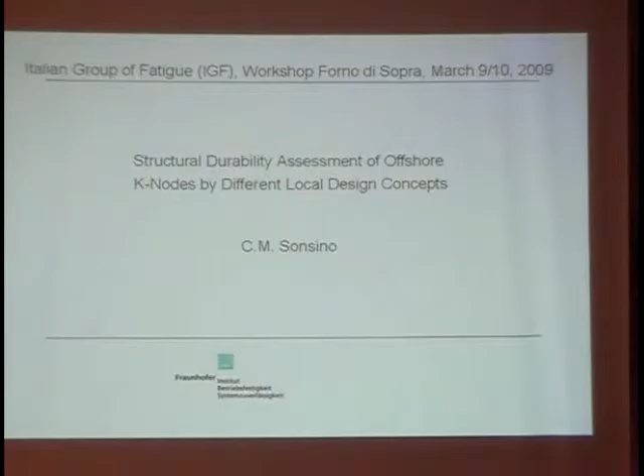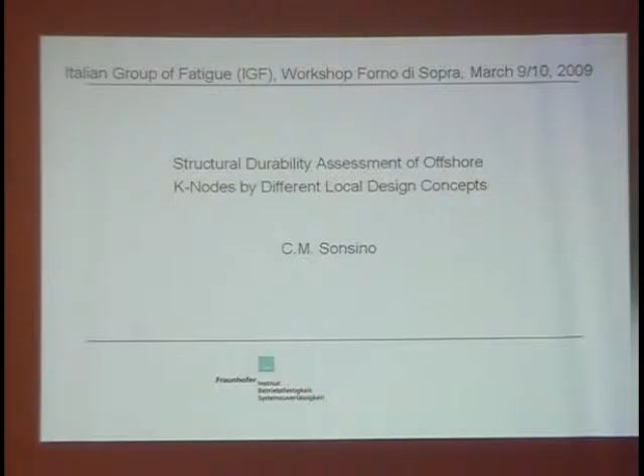Now, with regard to my talk, I want to talk about the structural durability assessment of offshore K-Nodes by contrasting different local design concepts. The question of offshore K-Nodes is again something which gains actuality, especially with regard to the energy problems, wind energy, and all these things related with that. And these K-Nodes are essential parts in the jacket of such structures. You can recognize it.

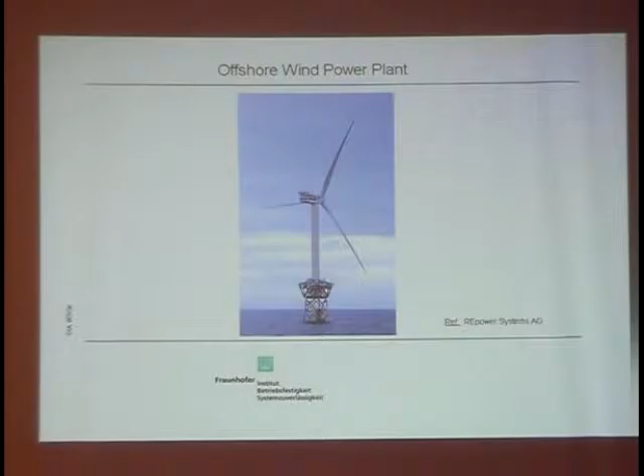These are these parts which are welded in form of K-Nodes. You can see it here, or in conventional oil platforms you can recognize it here. These are these structures, and certainly they have complex loading. It is not only fatigue loading, not loading only with variable amplitudes. We have also the environment causing corrosion, and we have to see how to work with that.

Now, the basis of the results that I am presenting to you was determined at the end of the 80s, beginning of the 90s. We had a very big program on offshore K-Nodes of the European steel industry. At that time, certainly, the evaluation was carried out with the methods of that time, of 20 years ago. And today we have modern methods. And as the investigations at that time were done very meticulously with strain gauges and all that was necessary, they could be re-evaluated with modern concepts. And this is what I'm presenting to you here.

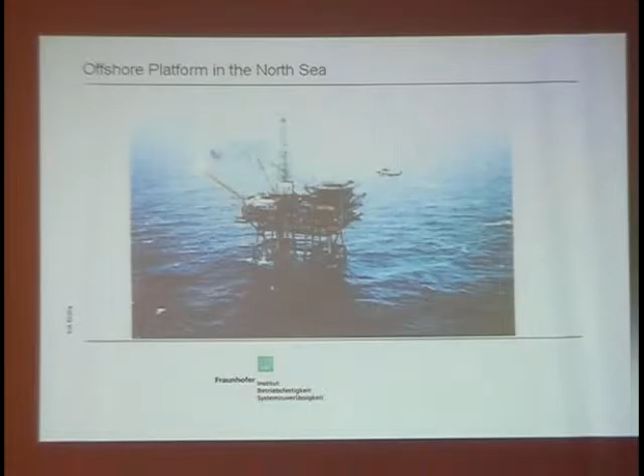Now, with regard to design concepts in structural durability, we had already spoken in the afternoon about these concepts. We have different concepts. The nominal stress concept is the classical concept, but it is only applicable if we are able to define a nominal stress. If we have a complex structure, or complex failure locations, and we are not able to define nominal stresses, it is useless to try to apply it. The second condition for the application of the nominal stress concept is to identify a notch case, a notch detail, a weld detail.

I am today not talking about the nominal stress concept, because you will see in the structures that I am dealing with, you cannot define a nominal stress. So this was the reason why the structural stress concept, also called the hotspot concept, was developed, for compensating the lacks of the nominal stress concept. But the structural stress concept, which I will also treat, has some shortcomings. It cannot evaluate, for example, hidden weld notches, slits, etc. All these things are in a logical continuation, a logical chain.

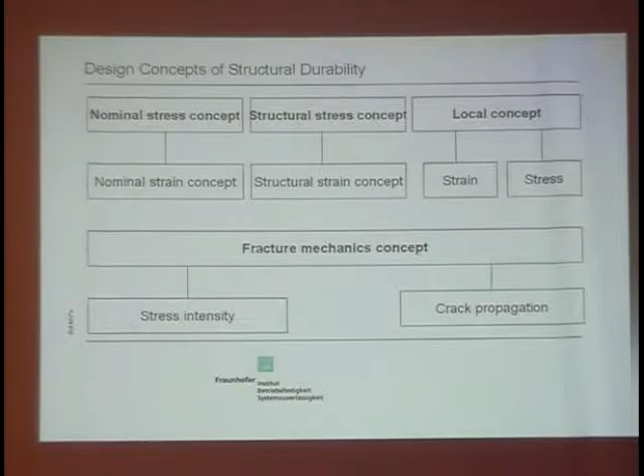Then the local concepts, as Paolo Lazzarin also introduced in his lecture, were introduced. I will treat here the local notch stress concept. There are also other variants. And certainly we have also the fracture mechanics concept. With regard to stress intensity and related energy, Paolo Lazzarin treated that. In my presentation, I will show you results and calculations of crack propagation. So I will treat these concepts which I have presented here.

Very shortly, about what we are talking: the structural stress concept. I'm not treating the structural stress concept with the value just close to the weld notch, which was also treated in one of the presentations, this old concept of Haibach. I will treat here the hotspot concept. The hotspot stress was also explained. It is gained if we make the stress analysis outside of the weld detail. Then there are some rules by which you can extrapolate the structural stress to the weld toe, and then you have to evaluate this stress.

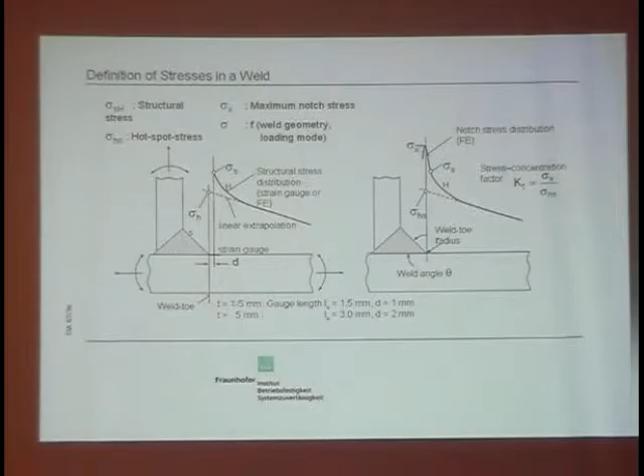But if you have a hidden notch, for example, if you have here a not fully penetrated weld, and if the critical area is here, you cannot do anything with this value, you cannot extrapolate it to this area. So what you have to do is to determine a notch stress for this area. This shows you schematically how you can put the reference radii in the different notches; especially in these areas you cannot capture these points by the hotspot stress concept

coming from outside. And with regard to this reference radius, Paolo Lazzarin also explained to you the hypothesis behind it. It is the micro-support hypothesis of Neuber, which was varied by Radaj, where he derived the value of 1 millimeter notch radius. Certainly the application of this radius also has a limitation. You can apply this concept only to thicknesses of 5 millimeters upwards.

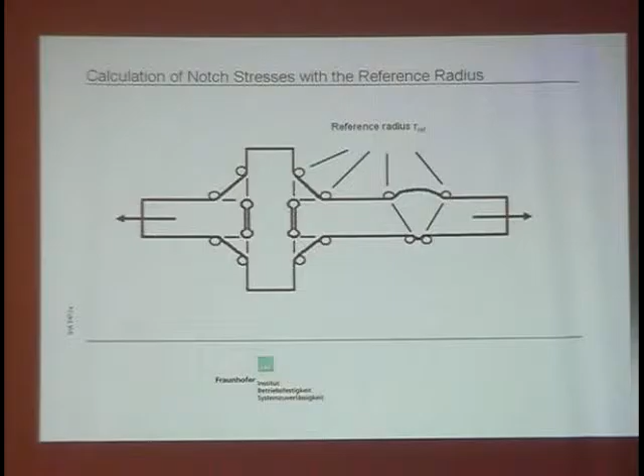If you are at 5 millimeters, you come into a conflict situation, so you have to make some compensations which don't function every time. And if you are lower, if you have thin sheets, you have to go to the 0.05 millimeter concept, which has a fracture mechanics background. But I'm not treating this. If you are interested in the application of the 0.05 millimeter radius, then come to Venice to the Eurojoin. There I will give a paper where I treat this concept with various examples.

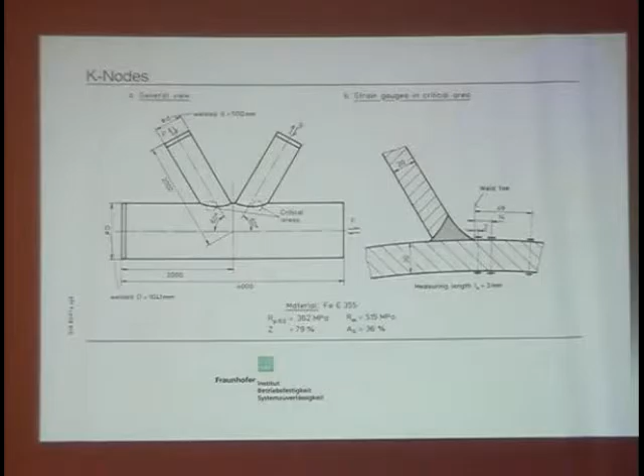The steel was the fine-grained steel FeE 355. This is a steel grade which is used very often in the ship industry and offshore industry. Now such offshore structures see variable amplitude loading in the North Sea. The load comes from the waves. What you see here is the overall spectrum for 1 year. It contains 10 different sea states, from low sea states up to very high sea states. Every sea state has a Gaussian distribution, but when you superpose Gaussian distributions, you end up with a straight line distribution. What you see here is also an omission.

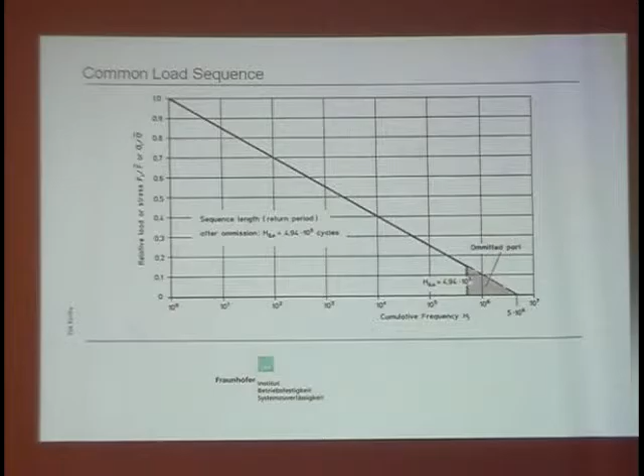In 1 year we have about 5 million cycles, because the frequency of the waves is not high. So you come up to 5 million cycles, but if you now want to carry out your test, you have to repeat this spectrum, this sequence, with a total of 5 million cycles, more than 25 times, because for an offshore structure the required fatigue life is at least 25 years. So you will never finish this test, so you have to make a non-damaging omission. That means omitting some amplitudes which don't damage, in order to do your test in a shorter time. So much for the spectrum.

Now to damage accumulation. What we apply here is the Palmgren-Miner rule. Please don't say Miner rule. Before Miner it was Palmgren. I think everybody knows how to apply the Palmgren-Miner rule. But what we do here concerns the damage sum. We don't apply the damage sum 1. It is already written in the IIW design recommendations: the damage sum to be applied is 0.5.

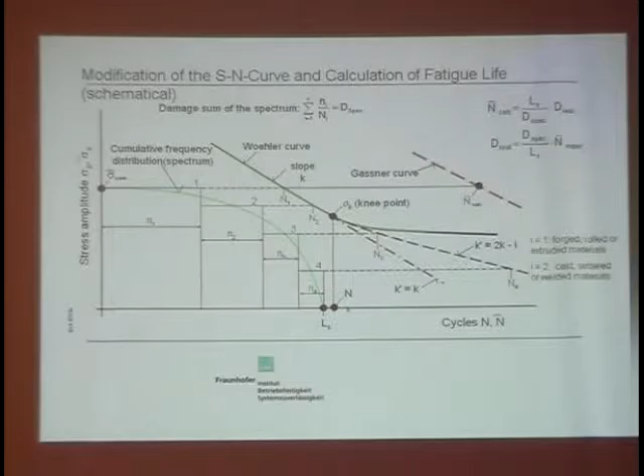This is based on a lot of investigations carried out in the past 30 years. If you apply damage sum 1, 90% of all published results under variable amplitude loading are on the unsafe side. So the recommendation coming from LBF, and now it is part of the IIW recommendations, is: please apply 0.5. So much for damage accumulation.

This is the test rig. Here you see the big structure. Here is the actuator. It is a 2,500 kilonewton actuator. Here you see the braces joined to the chord. And you see here also a basin. This basin is filled with artificial seawater with North Sea conditions.

That means we have here a pH value of 7 and permanently a temperature of 15 degrees. Certainly in the North Sea the temperature also goes down, but for corrosion it is important to have the higher temperature and not the lower temperature. And so you see here with these elements, the actual loads are introduced into the structure. The maximum frequency we can carry out here is 5 Hertz, only for the smaller amplitudes.

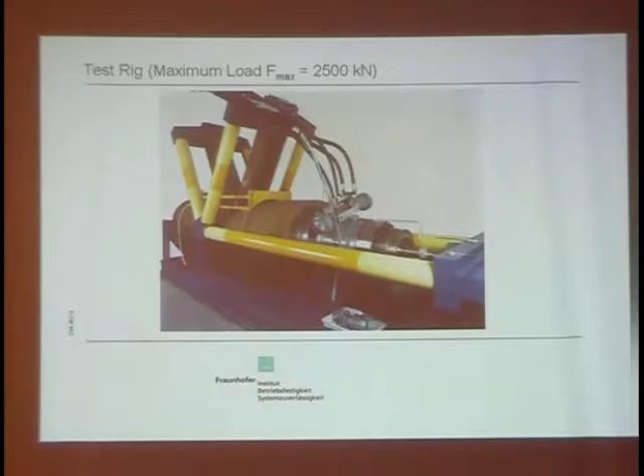We have carried out here constant amplitude loading tests, only 3, and 5 variable amplitude loading tests. The test duration is between 4 to 6 months in constant amplitude loading, and in variable amplitude between 5 months and 1 year. So one institute could not achieve this task, therefore we were 3 institutes and we shared the work among us. Beside the LBF, the IABG and the Thyssen Research Center were involved in this work.

Now let's have a look first at the results that we obtained, all presented first in the system of the applied load. Here we have the load range, and here we have the cycles. On this side we have the constant amplitude loading. There are 3 tests which have been carried out. The triangles are the test results in terms of breakthrough. This is the stop criterion. It corresponds to total failure of a relatively small specimen.

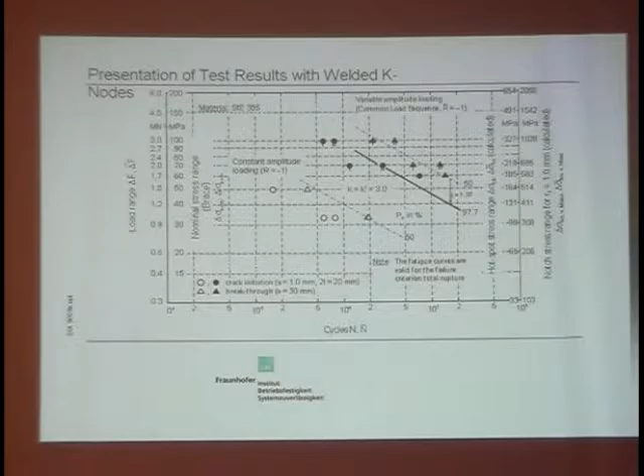But what we also registered during this test was the fatigue life through crack initiation by the potential drop technique. It was continuously registered. The technical crack initiation had a depth of 1 millimeter and a surface length of 20 millimeters. And after this point, until the breakthrough, we also registered the crack propagation. I will show it. And here the black points, the circles, and the triangles are the results which we obtained under variable amplitude. Now we can make through the points, for example for breakthrough, the mean curves.

We have also here the slope of 3, so we are not in conflict with the IIW regulations, where the slope of 3 is also prescribed. And certainly these are 50% values. Afterwards, we want to evaluate the values with design curves of the IIW recommendations, which have a probability of survival of 97.7%, mean value minus 2 standard deviations. So we have to transfer the mean values to the same probability of survival, 97.7%.

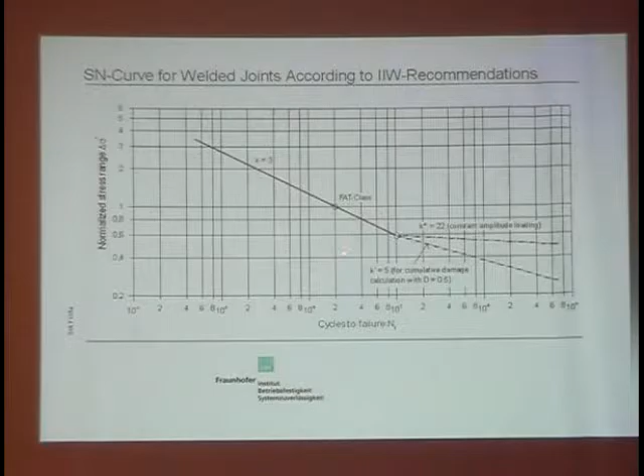Here this transformation is done under the assumption that we have a scatter band of the stress of 1 to 1.50. This is a recommended value, applied also in the British standard as well as in the Eurocode. So all these 50% values were, for the later evaluation of the results, transformed into 97.7% values. So far to the evaluation. I want to continue here with the prerequisites first for the evaluation.

You see here schematically the design curve according to the IIW recommendations. The design curve is fixed by the following points. First, the FAT class is defined. This is the stress range at 2 million cycles with a probability of survival of 97.7%. Then we have the slope here of 3. 3 is certainly not a general slope. We can find other slopes in welded structures, but if we have thick and stiff structures, we end up with this slope of 3.

We come here to the knee point at 10 million cycles. This has been accepted for 3 years and introduced into the IIW recommendations, based on a lot of evaluations of results from the LBF, from TWI in the UK, from Exxon and from Det Norske Veritas, where we see that the knee point, or the change of inclination, is about 10 to the power 7 cycles. In the Eurocode it is still at 5 million cycles, but here we have 10 million cycles. And after the knee point, we still have a diminution of fatigue strength.

Ladies and gentlemen, please don't talk about fatigue limit or endurance limit. I have heard this several times today. We don't have an endurance limit, we don't have a fatigue limit. We always have a drop of fatigue strength. If you talk about endurance limit, you mislead engineers to think that there is really something there, and they program failure. So you also have a responsibility toward engineers who are not experts. So please select your wording very carefully. So under constant amplitude loading, after the knee point, we have a diminution of the fatigue strength by 10% per decade.